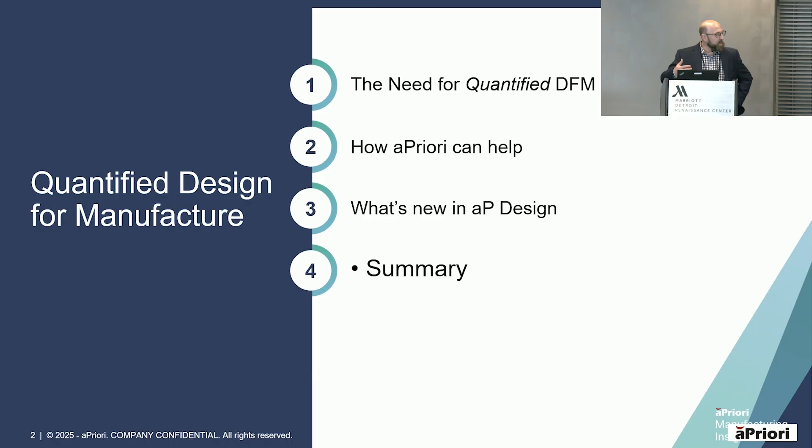We're going to talk about why we have the need for quantified design for manufacturability. Yes, we can identify things—people have been doing that manually for years. I've got a 30-year-old textbook from my master's program that I still pull out every once in a while; that's the foundation of what we're talking about. So how aPriori can help, and then finally what we're going to do is show you what's new in our aP Design platform that can help aid you visually and give you more tools to be successful up front.

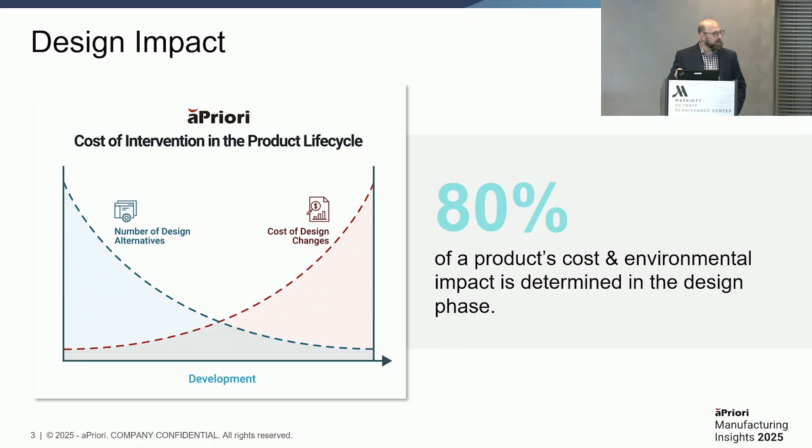This chart has been shown throughout time: once your product is out on the market, you've got about 20% of wiggle room left. You could change the materials, you could change the process, but in reality 80% of those costs have already been made—that decision has been made for you. So the only way to get a lower cost is to go back and either redesign it or catch it from up front.

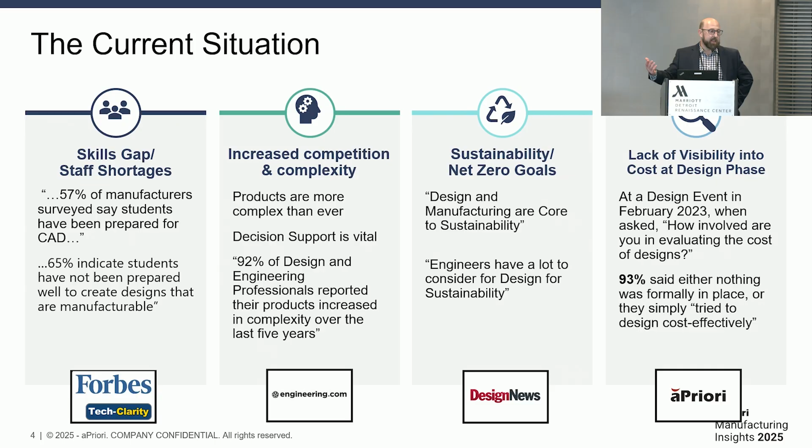Engineers are becoming scarce. Deloitte says even this year alone we're going to have a 2.5 million person shortage for engineers. We've got a lot of products that are going to hit the market, and we just don't have the talent. I heard brain drain in 2017, because I'm from the Pacific Northwest. We've got Boeing—we called it the silver tsunami, like Boeing was going to just lose all these engineers that have been there for 30 years. Well, it's a real thing. I hear people coming up saying, well, we had a guy but he retired—so what do we do now? Well, maybe aPriori is here.

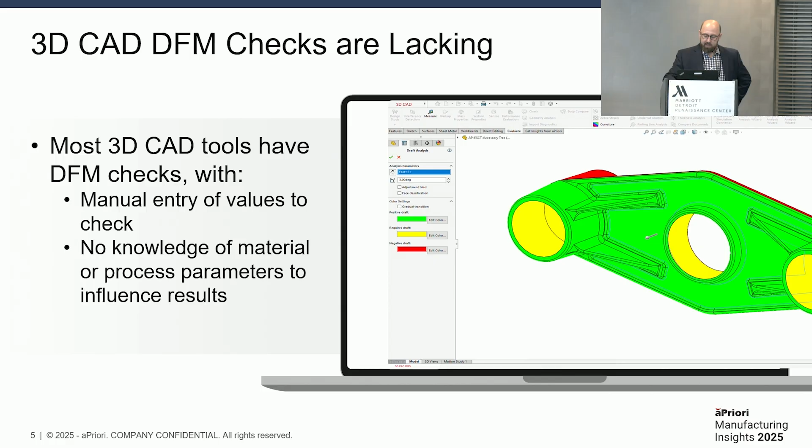CAD systems have had some light DFM checks for years. I remember in 2005 I used to use the NX2 draft analysis—it gets you some nice pretty pictures like this. Well, what are you going to do with that? Typically you need to know what you're looking at, and you get nothing more than just kind of the visual feedback. And that's where aPriori can bring another layer to that discussion.

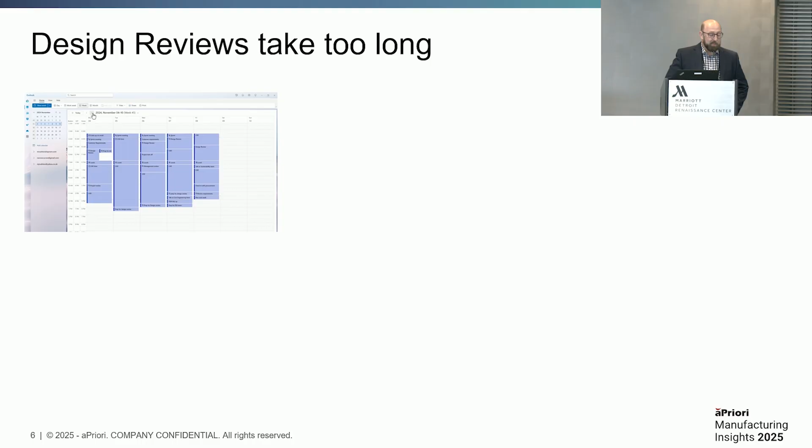So once you're in the design, you're going to end up having a design review—whether you're at PACCAR and it's some toll gate 2. At some point you're going to have to get in a room, but most likely you're on the phone. Probably 4 out of your 8 meetings of the day are probably some sort of design review in a bigger company. Trying to schedule those things is very difficult.

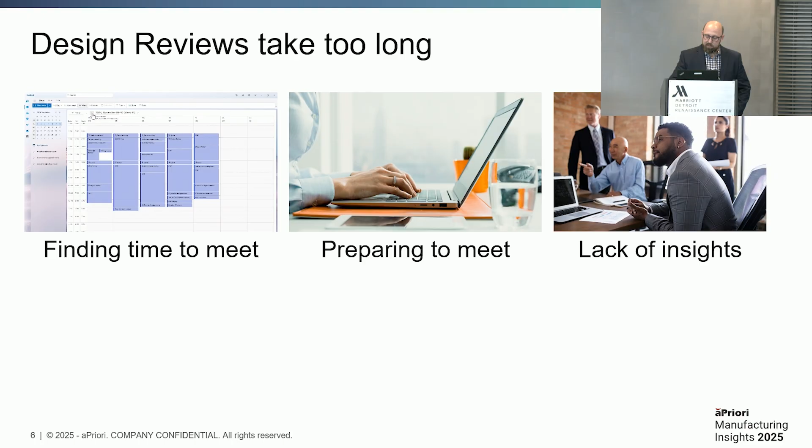So finding the time to meet, preparing to meet, what are you going to show? It's typically going to be in PowerPoint. And then, like you said, once that silver tsunami comes, you've got that one guy who knew it all and is taking over the conversation. Well, he's gone. Now you've got just the juniors trying to figure out if this is going to work or not. There's going to be some differences of opinion, and that person that's going to corral the younger minds might not be in the room anymore.

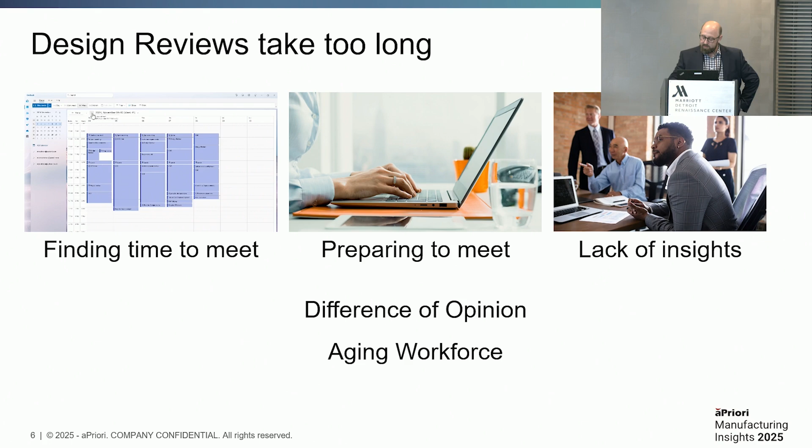So what's our options? Well, we could go to the supplier and we could get feedback from them. Well, that takes a bit of time—you might be too late at that point. And then what's their motivation on their feedback? I know a lot of programs at PACCAR,

we would almost design the product around the manufacturer's capabilities and their machines. So you're dealing with Magna, they're our stamping facility—well, they're also making the BMW X3 panels as well. So we got to share the facilities, and if we need additional capacity, that's a hard thing to do. So they're going to drive you towards the path of least resistance from their side, not what's ultimately the best design for the product.

And typically their feedback's going to be subjective and rarely quantified, because they're trying to just get you through so that they can win the business and get into production.

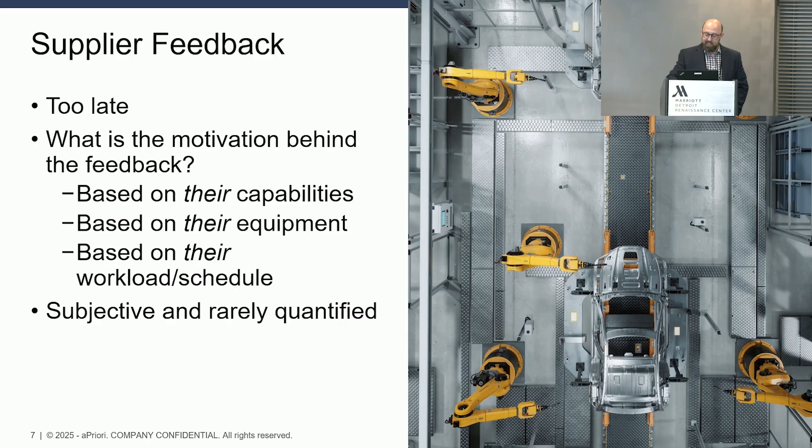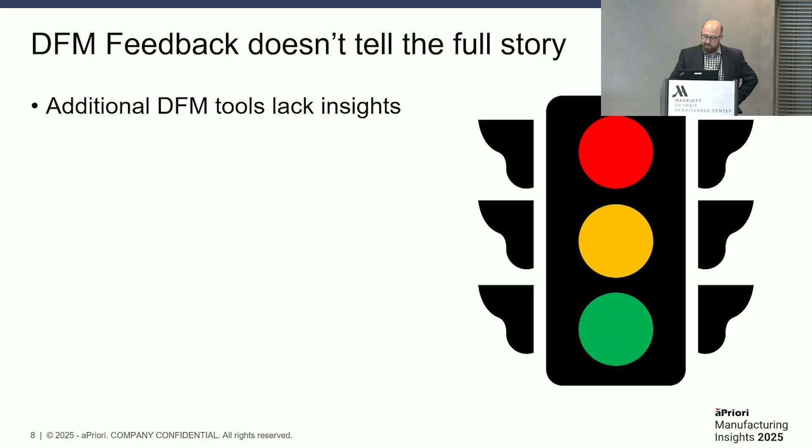So DFM feedback doesn't always tell the full story. Certain tools lack the insights, and even us right now, we catch a lot of issues that may not have any impact. You'll see in our product roadmap that we're working diligently to categorize those as critical issues versus minors, so that you can focus your attention on what matters.

But why is it an issue? That is something aPriori has always done a really good job of. We'll show you what the current condition is, what an optimal condition would be, and then an explanation for why we're flagging it in the first place.

The aging workforce thing—like when I was managing interns at PACCAR, these kids loved the DFM feedback because it wasn't something they were getting in their university studies, but it was a tangible thing that they came away with that put them ahead of their peers.

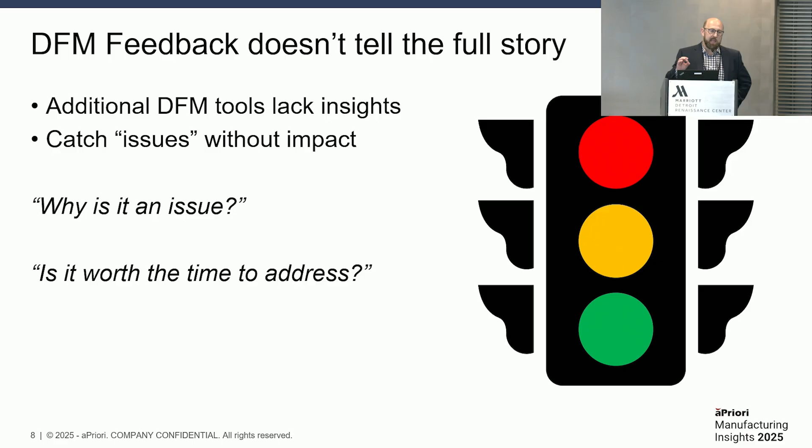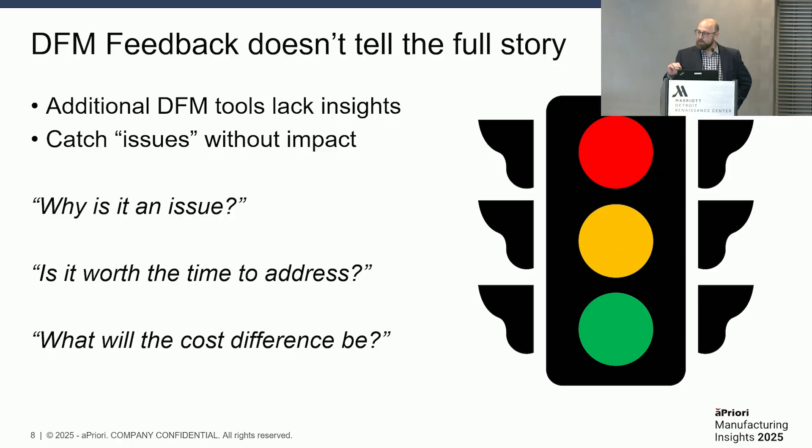Is it even worth the time to review it? We're talking about design right now, but ultimately we're creating data that's going to be analyzed offline with some business intelligence tool. Even as a customer on-prem, I was using reporting to communicate what we were finding within engineering so we could make good decisions. Now that we're on the cloud, we just enhance that capability even more. That reporting may be in real time, but you may find that cost difference in some business intelligence tool, whether it's ours or yours. I'm really excited for this to get hooked into a lot more systems - that was definitely something I wanted as a customer myself.

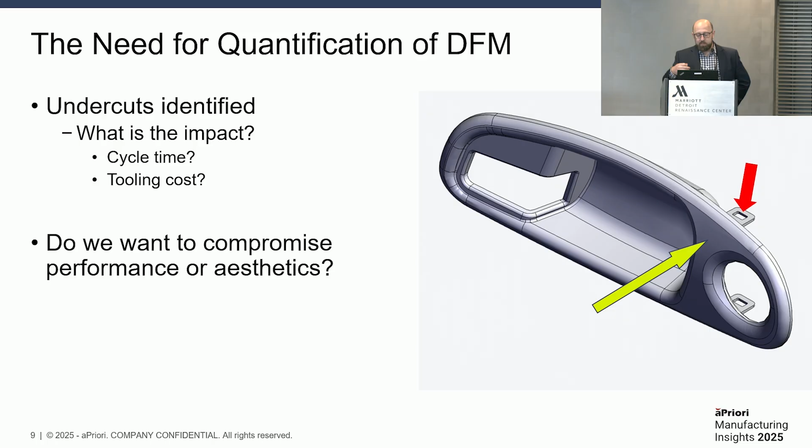So the need for DFM, what's the point? We can show you, okay, right here we've got an undercut. What's that going to ultimately do to your product? Well, it may increase the cycle time, but most likely it's going to increase your tooling cost. So do we modify the design? Does it affect the performance, or is it just an aesthetic change? Within design, because you aren't released, we can try different iterations and compare them to see what is the impact - is my cost going up, is my cost going down?

Ultimately, we want to find the best balance, and the cheapest way to do that is to not involve a supplier, not involve your subject matter experts, but just let the designer get this initial first glance at it, and then let it go through the toll gate process after that. So what are those trade-offs? Cost versus performance, typically.

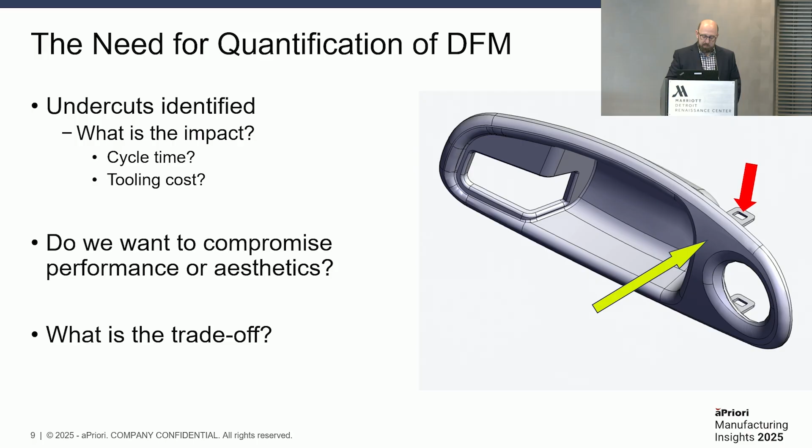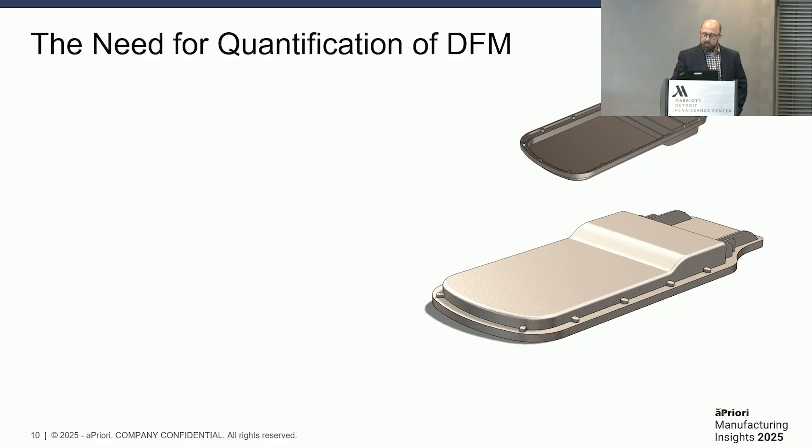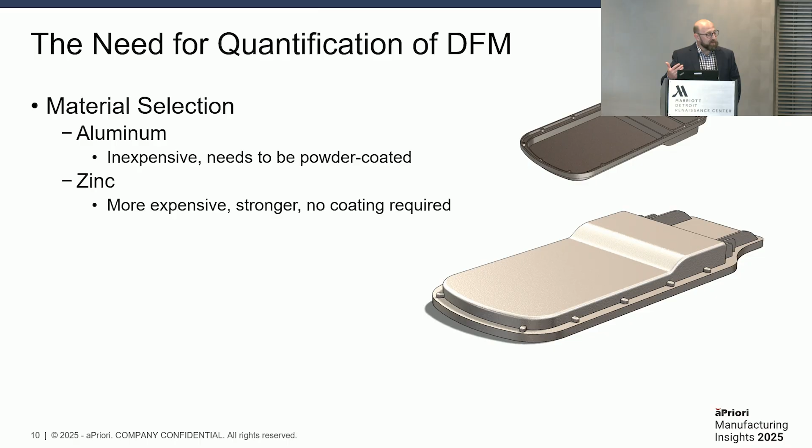Here's a customer example where the question is should we go with a lighter weight design out of aluminum that would require a powder coating operation, or could we die cast this in zinc and take the extra weight and extra cost? Ultimately you can test those waters out before launch - you're finding aluminum, yes, it's cheaper, but we need a secondary process. Zinc, it's a little bit more expensive, but we don't need to coat it because it'll handle the weather. Since weight's not really an issue for a street light, they went with the zinc.

So the trade-off, a little bit heavier, but you get to know that right now rather than once you get to production.

This is just an example of the different issues you could have. Design number A comes back with a list of issues - we've got time that we need to redesign this. That could delay your project. Delays mean lost market revenue share. You may have penalties with your suppliers, some sort of contractual obligation to make things at a certain time, and if you miss that, that's a problem. And those misses hurt your reputation and your supplier relations.

On the other hand, you may have something that goes right into production, costs more than you thought it was going to, which ultimately reduces your profitability. Then you get into it, and the design isn't real great. You have a lot of production scrap and rework. It's taking you longer than you hoped. Your suppliers are upset, you've got bad customer satisfaction, and ultimately your market reputation is failing, and they may go with your competitor on the next order.

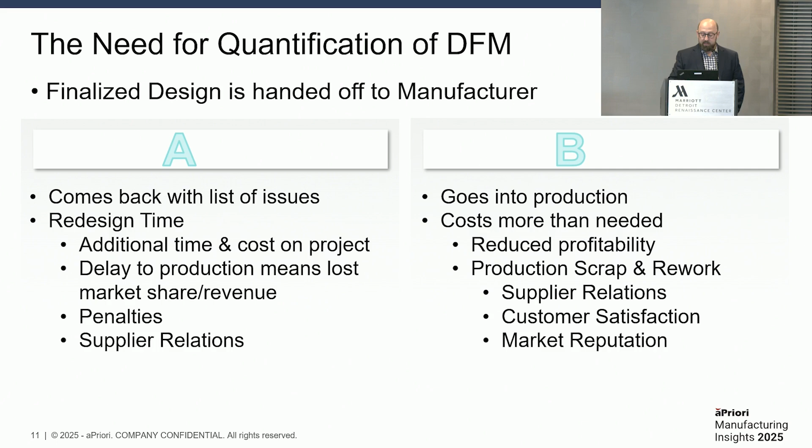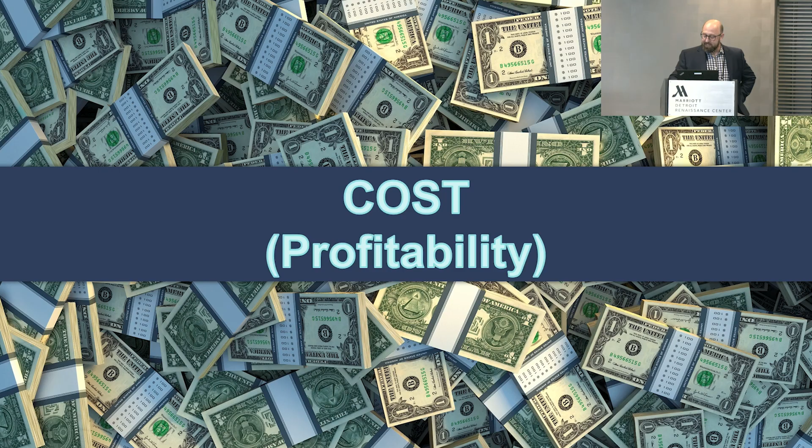So what would more time mean to you? I think everybody kind of knows the answer, and that is additional profitability, like lowering your cost up front. Scott, I've seen your presentation before, but I missed it today - I imagine cost avoidance is a big thing for you guys at Dana. It always was for us as well. It's harder to measure, but it is the most important thing when you want to get that final balance sheet in the black, which PACCAR has for 83 years straight.

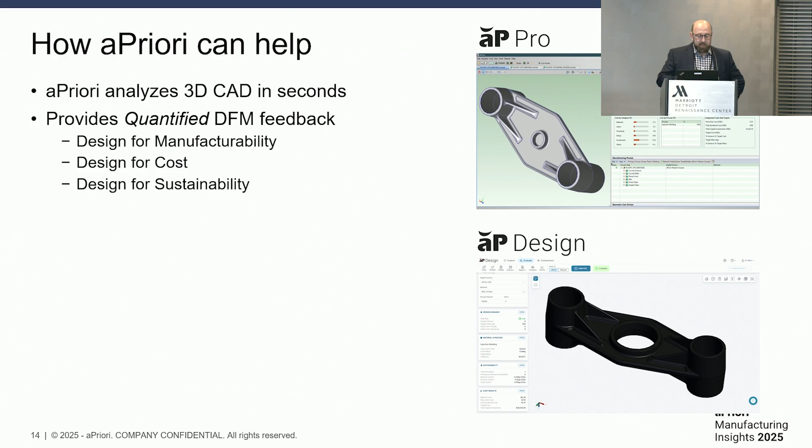So how can aPriori help? We analyze the 3D CAD file, whether it's using AP Pro or AP Design, it's the same engine, just a different user experience. But ultimately, we want more people using it, providing that DFM feedback, whether it's for manufacturability, cost, or sustainability. We don't see a ton of sustainability requests during this administration, but it's going to come back. The world's still on fire, but alright.

So quantifying - ultimately this is a presentation about quantifying the DFM. So when you have issues and you have part A versus part B, what's the part cost?

You can compare those. How much does the assembly cost? Rich and I talk all the time about tooling cost - that's something you get to unlock within aPriori that is immensely valuable. From my aerospace tooling experience, I leveraged this at Kenworth, and it was a layer we just didn't have before because I knew what the tooling suppliers' margins were going to be. So if you're not doing that, you should.

Having a good idea of how much time it takes to set up, how many setups - we've got complex machining operations, and ultimately we're driving down to cycle times at some points. So if I'm using one machine versus the other, we're starting to get into the territory of a manufacturing engineer. But when you've already created that attribute, it's to your advantage to understand up front what's affecting cycle time. So if one design with a different process takes more or less time, is the machine compatible with that, or how's it all going to affect itself?

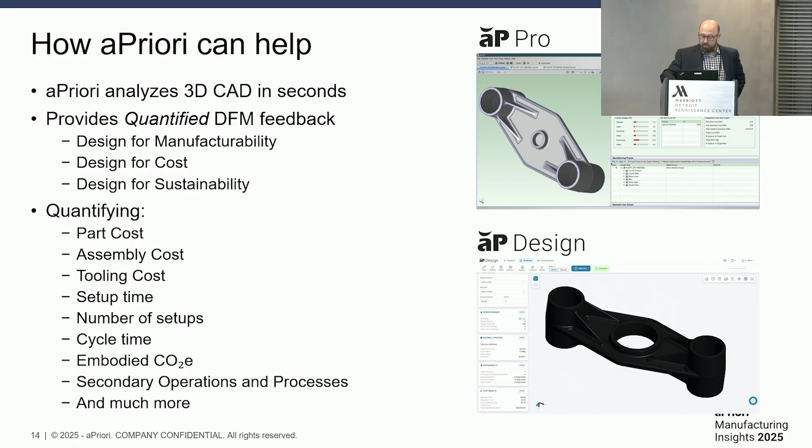The embodied carbon - that would be your scope 3 emissions, so it'll come back, we'll leave it at that. We're also going to be able to show you the secondary operations as far as deburring, painting, zinc coating, plating, and so much more. And now that we're soon able to share this data with BI tools and all that, it's just going to get better and better as far as the decisions we can make with this information created up front, without waiting for a formal review towards the end.

So let's go through a couple of quantified examples of DFM. I don't like the word should cost. I have a saying: all cost models are wrong, some are useful. You're allowed to use that.

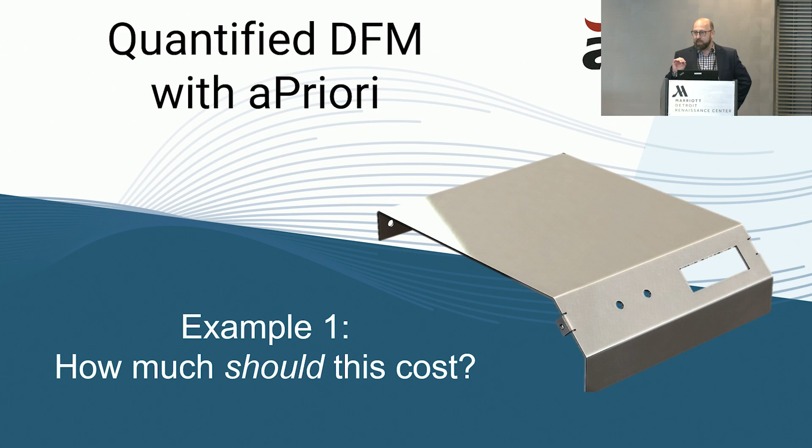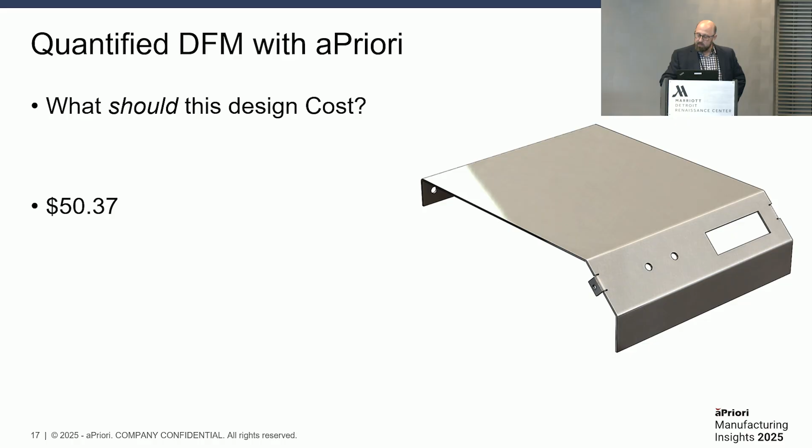It's all dependent on what your attributes are to start. In this case, my notes say this was made out of 321 stainless steel, and we're going to make 10,000 of them. So that's one scenario as far as how that could affect the cost. Is it a should cost? I'd argue it's a could cost. So with those scenarios, what would it cost? We're coming back with an initial estimate of $50.37. That's a quantifiable DFM effect, because I may have a different design. I can look at the feedback from this and determine if that price is going up or down as I take my feedback and adapt.

Now the other thing is, we're all trying to balance capacity. We're trying to get things done in a timely fashion, and we only have so many resources available. So cycle time may be the most precious thing you have in your manufacturing facility.

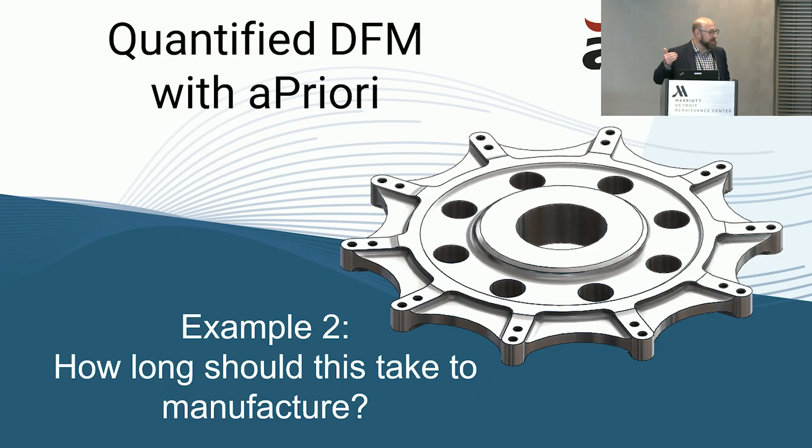I have a master's in constraints management certificate that was with the rest of my kind of MBA, and I subscribe to the Goldratt principle of the theory of constraints. Ultimately, you want the slowest Boy Scout to be leading the charge, and a lot of times having this cycle time information can help streamline and get more product through your shop.

We're generating a cycle time - this is something that's verifiable, we can go into the geometry and see what went into those things. So in this case, if it was stock machined, this could take a little over 33 minutes, for one could-cost scenario for the situation we set it up for.

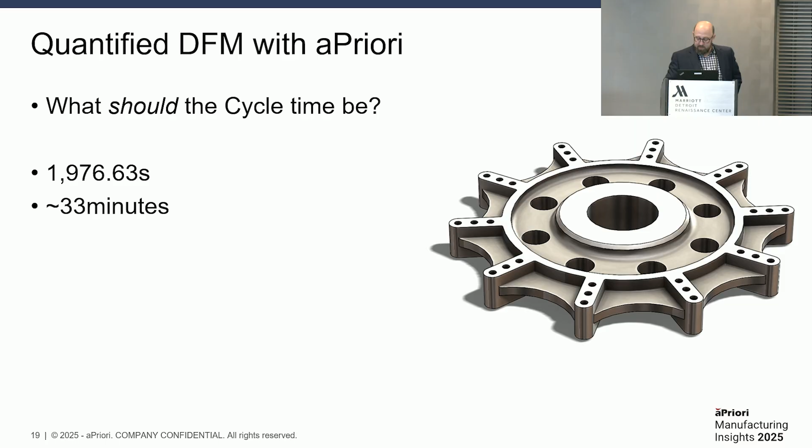Now plastic, on the other hand - I really like this one because it draws back into tooling strategies as well. So how many cavities would be the most optimal? aPriori looks at this in a few different ways. By default, we'll just say we're going to make your batch sizes, yearly quantities, and total lifetime volumes off of one single cavity tool. Is that the best way to go? It's one way to go.

So I was having this conversation with an electronics company in California the other day, and I was like, well, it's saying 32 cavities, but if it were me, I'd be risk mitigating this, and I'd want at least 2, I'd want 16 cavities. And that's exactly what we're doing. So in this case, our ideal situation is 8, and that's based off total volume and also materials. We'll have a lifetime for that tool, and it's gonna eventually wear out, and you're gonna have to buy multiple tools. So we'll give you the ability to look at the cost trade-offs between single, double, quad, 8 cavity, etc., and find a happy balance there.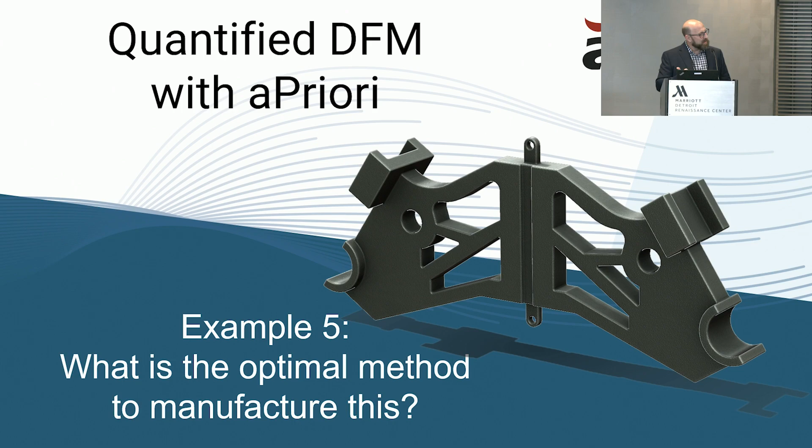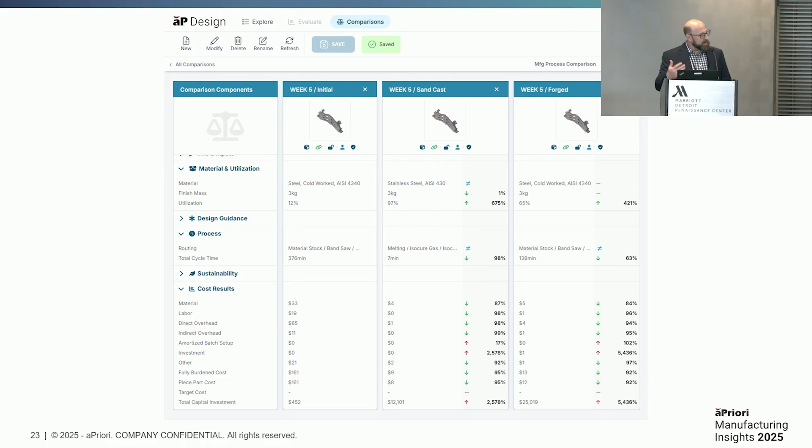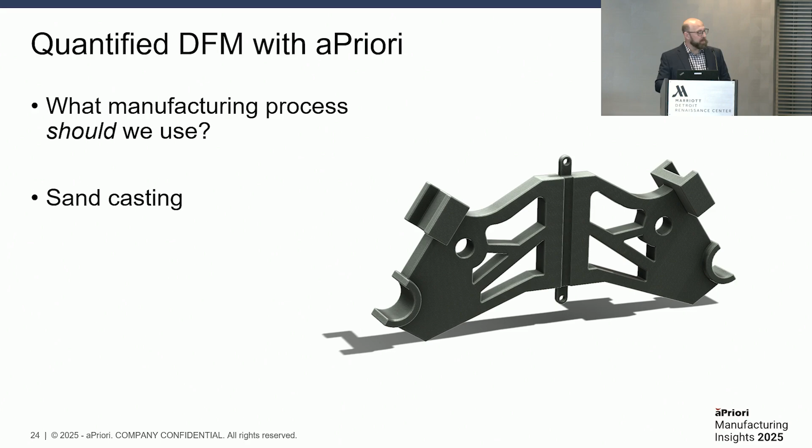So on this one, maybe I'm not sure how to make it at all. I could probably machine that. Maybe it could be a forging. Maybe I could sandcast it. What would be the optimal method for that? Well, why not just try all 3? Within design, we've got the ability to stack up against your initial thought. Let's try to machine this first, and then let's also make an iteration that is sandcasting and forging. So once we get that, we determine, based off the volume, sandcasting will probably be the most appropriate for this shape, based off its features, in order to drive the cost down.

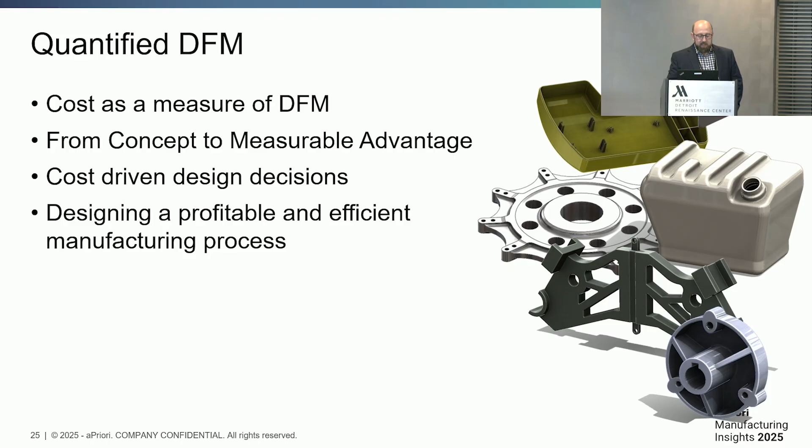So the quantified DFM is the cost and effect based off the feedback that we're providing. We're getting in there early. We can start from the concept, and as you're using AP Design, we're keeping track of all of those iterations, and we start with a base and have a final, so that you can find out what that ultimate delta was as you made those changes, so that you can make these cost-driven design decisions and ultimately lead to more profitable products that fit the requirements of the design, and ultimately we want to make you financially viable so that you keep spending money with us.

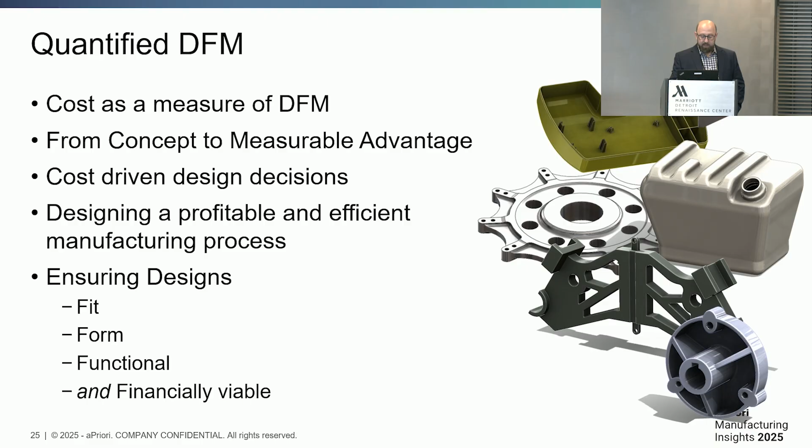All right, so that's going to be it for the quantified DFM portion. We're going to show a little bit of what's new in AP Design. It's definitely, for me, like the little brother of AP Pro. So there's some things that aren't there, and as we mature, we start adding in things that weren't.

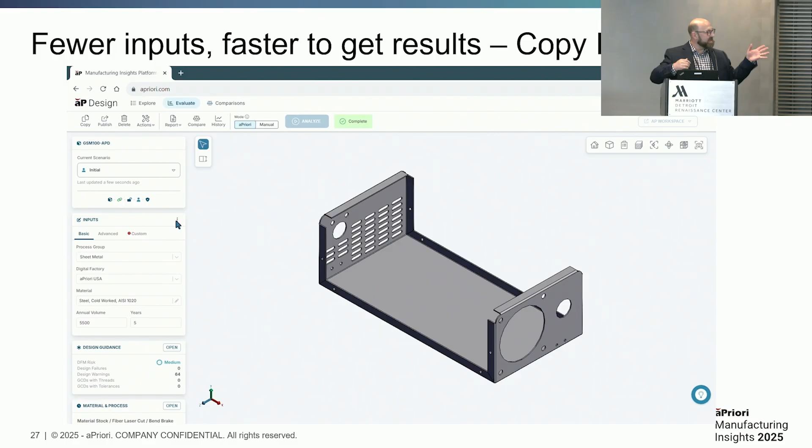In aPriori, one of the really fun things is when you're doing a bunch of parts, you can reuse the inputs that you've had from a previous part. Well, we've added that to design now, and you also get a visual representation, and this kind of just shortens that workflow time so that you can get on with it.

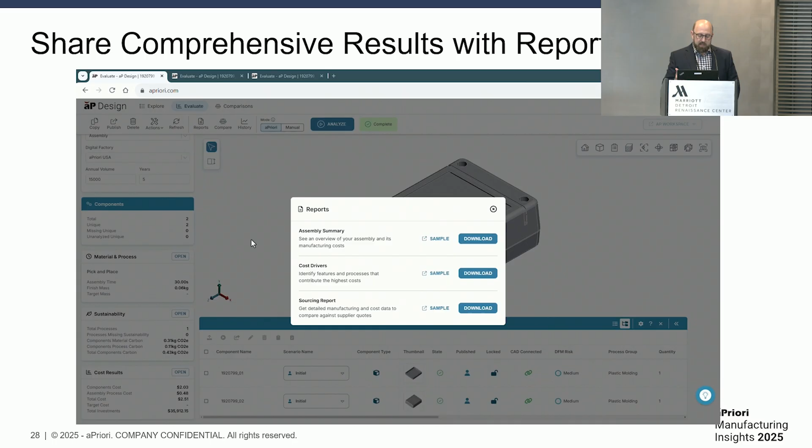Another thing that AP Design was lacking was it only had one report for a while. It was basically just the part cost report. So now we've added additional reports, and we've got sample reports, so you can preview what it's going to look like before you generate it, and that's been really popular since we've launched it.

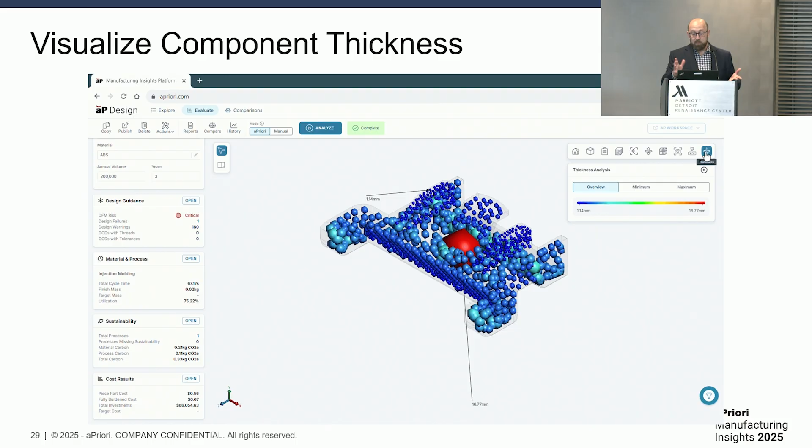The visualization within Pro is really useful, and we've slowly been adding those into design, because this is when you really want to know it. The cost engineer or the manufacturing engineer, by the time it's at the review stage, it may be too late. So with our thickness visualization, we're able to isolate where it's uniform thickness versus where's the extremely thick position, so that you know, oh, well, I've got a really massive heat sink in the center. Should we be hollowing that out before we cast it?

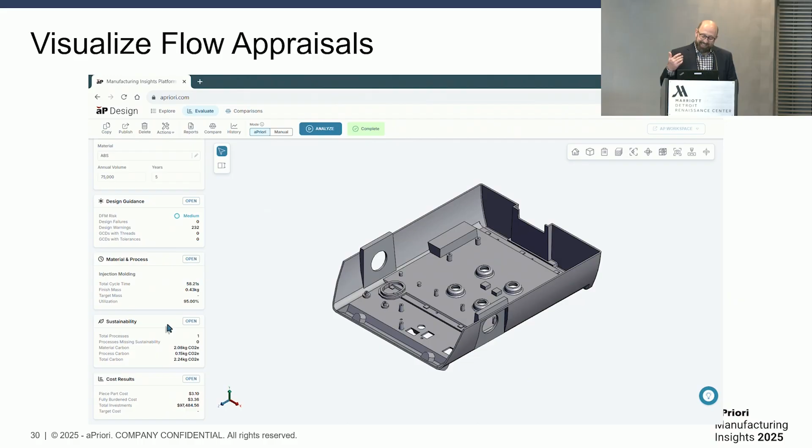This is probably my favorite. This has been available in Pro for a while, but this is visualizing the flow appraisals, and we were able to add this within aPriori because the formula that goes into calculating the cooling time required some math behind it. It's using the Schuler formula, I'd have to look it up, you can ask me later. But anyway, because we're using the formula that's widely accepted in engineering, we're able to visualize what that pressure looks like and look at 3 different iterations of the flow, so that you can right away see if we have a design that could potentially trap air, without having to go all the way to someone who's going to use a full mold flow analysis. So this is kind of quick mold flow. It's a really popular one.

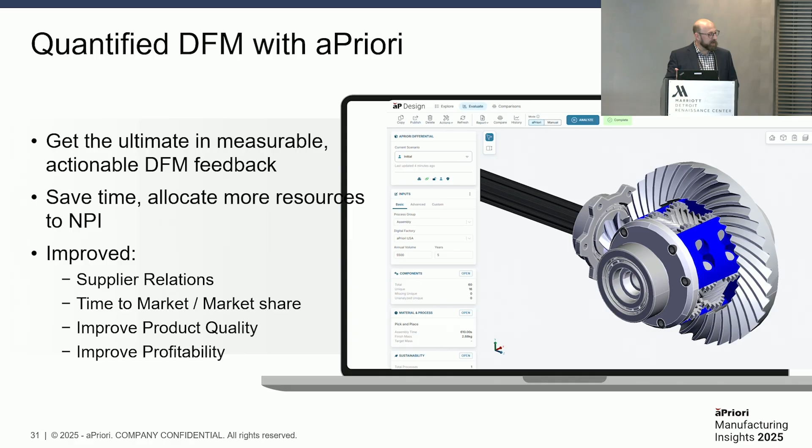So with Quantified DFM with aPriori, you're going to get the ultimate in measurable actionable feedback. You're going to save some time. You're going to allocate more of your resources to getting those new products out. Ultimately, this should lead to better supplier relations, better time to market, improved quality, and because I'm a goal-directed guy, what's the goal? Make more money now and in the future. So, improved profitability.